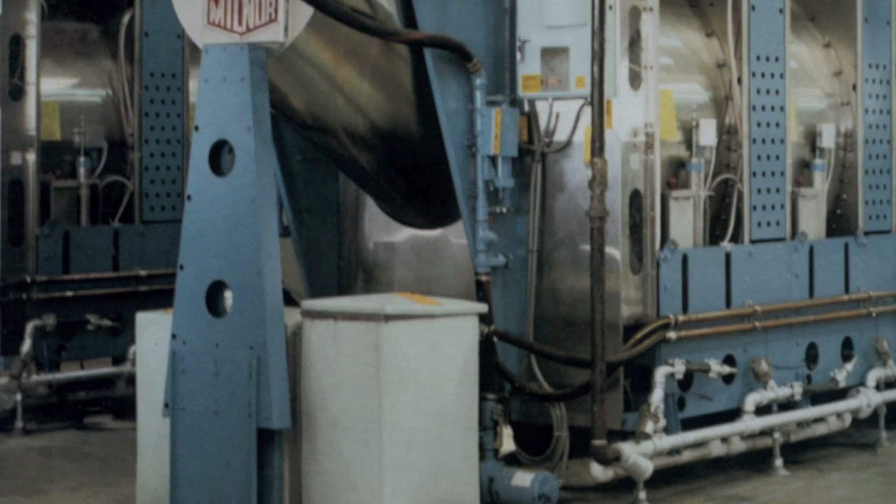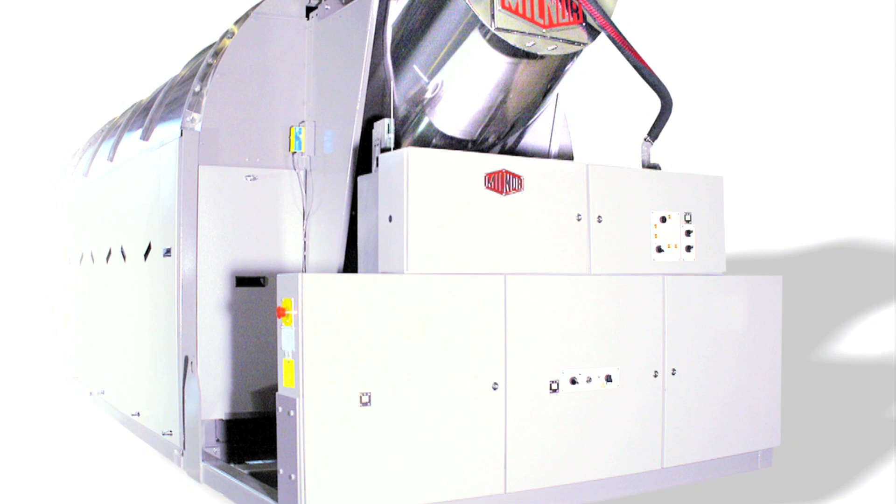In 1979, Milnor introduced its True Top Transfer CBW batch washer and has been a worldwide leader in tunnel washing since, with other innovations such as solid welded partitions, double drum construction, high mechanical action, and capacities ranging up to 260 pounds or 120 kilograms. Our productive and efficient equipment is unrivaled.

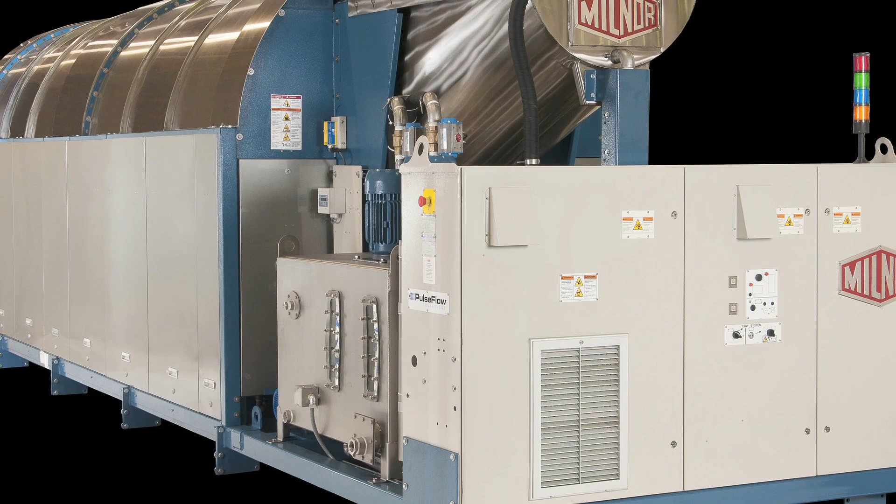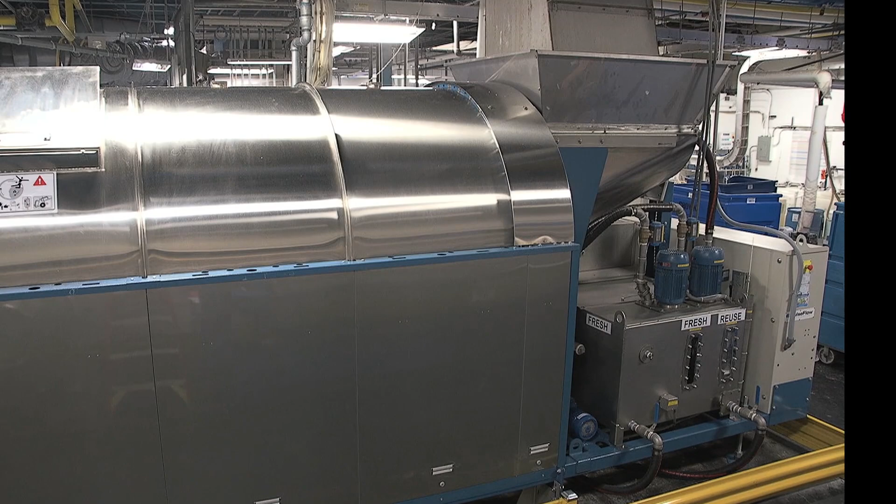In our continuing efforts as an industry leader, we introduced another CBW washer innovation in 2009: a revolutionary, patented and patent-pending system. Pulse Flow technology has been successfully implemented in healthcare, hospitality, and linen supply applications worldwide. The superior soil removal and rinsing performance of Pulse Flow technology has been verified by independent testing laboratories and has earned a Hohenstein Certificate of Innovation.

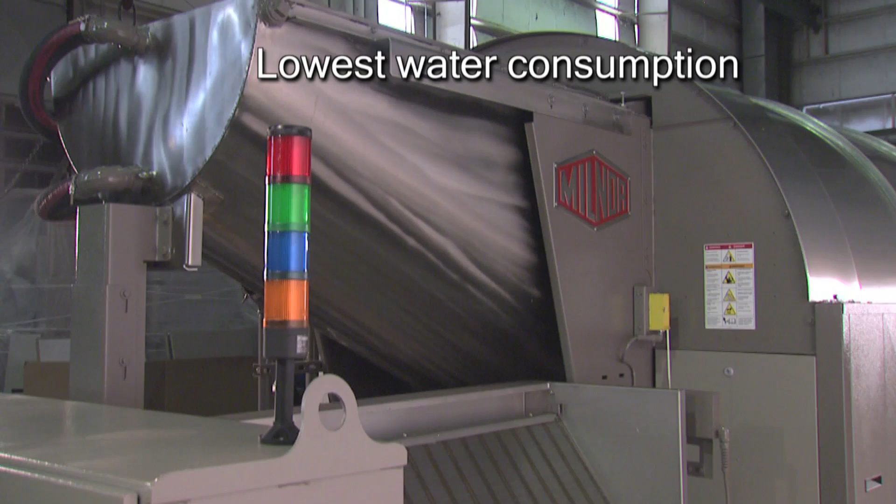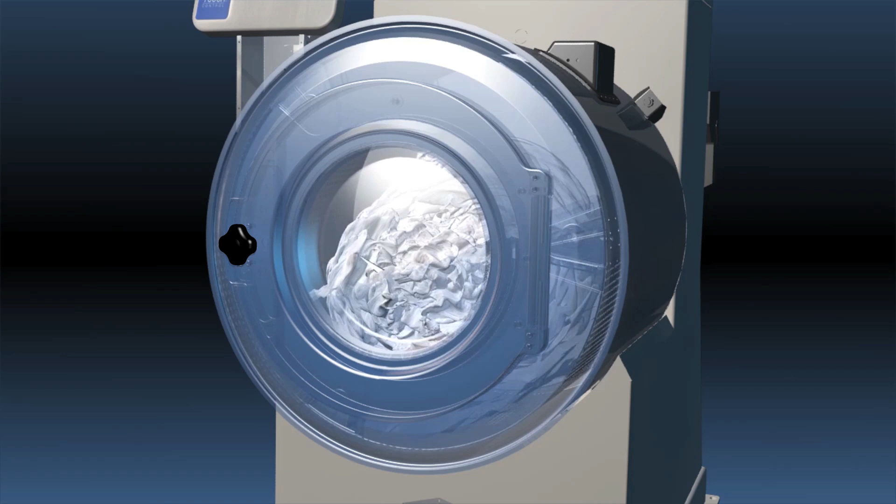Pulse Flow technology in a Milnor CBW washer offers lowest water consumption, enhanced chemical performance, low energy usage, faster washing, and longer linen life. To understand how Pulse Flow is able to produce quality linen with the least water consumption and significantly shorter process times, let's first review how a washer extractor performs these steps, and then compare.

A wash formula is comprised of three functions. First, standing bath processing with the appropriate chemistry for the step's function. Second, drain for dilution. And third, refill for rinsing. These steps are repeated depending upon the wash formula.

Pulse Flow emulates the same process while reversing the last two functions. In a Pulse Flow CBW, standing bath processing is achieved by turning off all water flows and closing the flow stop valves. There is no water moving in or out. For Pulse Flow, the minimum time for this function is typically 40 seconds to achieve chemical equilibrium.

Then Pulse Flow high-velocity rinsing turns on for the last portion of the process time. This is similar to step 3 in a washer extractor, except more efficient because of the high-velocity flow. And like a washer extractor, processing and rinsing take place in the same module, so the module is dual use.

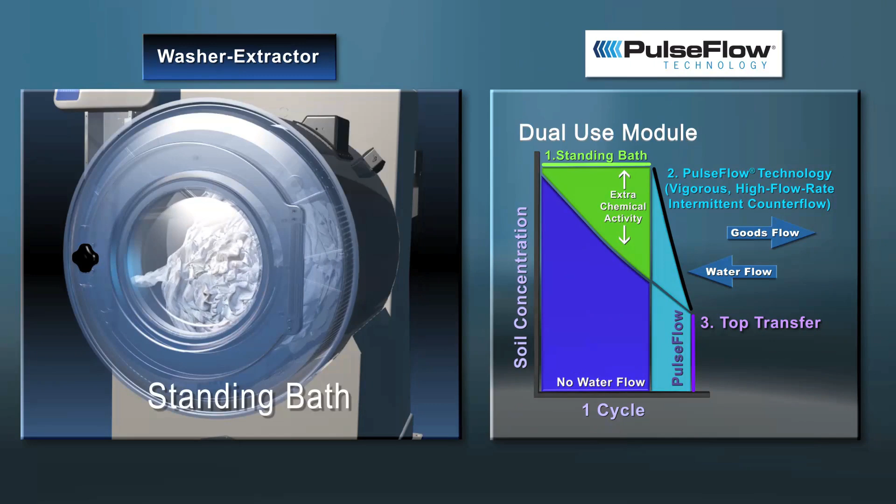Transfer to the next module occurs using True Top Transfer, which is equal to a drain, or step 2, in a washer extractor. Thus, Pulse Flow recreates the highly effective process methods of a washer extractor while using high-velocity counterflow rinsing and True Top Transfer to achieve very low water consumption and still obtain superior quality.

These curves illustrate what happens in subsequent modules in a Pulse Flow CBW. This 8-module Pulse Flow CBW has 7 dual-use modules, which function as processing and rinsing modules. Pulse Flow does not designate specific zones such as pre-wash, main wash, bleach, or rinse.

These dual-use modules perform the washing or bleaching function for the first part of the cycle time and then act as a rinsing module for the last portion of the cycle. Only the last module has a specific duty, that of applying the finishing chemistry such as sour, bactericide, and starch in most processes. Any makeup water injected here is fresh water.

Recirc 1, a patented pump arrangement in the first module, is an important part of Pulse Flow technology. It turns Module 1 into a working module by thoroughly wetting the linen and infusing chemistry. With Recirc 1, chemical concentrations quickly reach the proper levels and equilibrium is rapidly achieved.

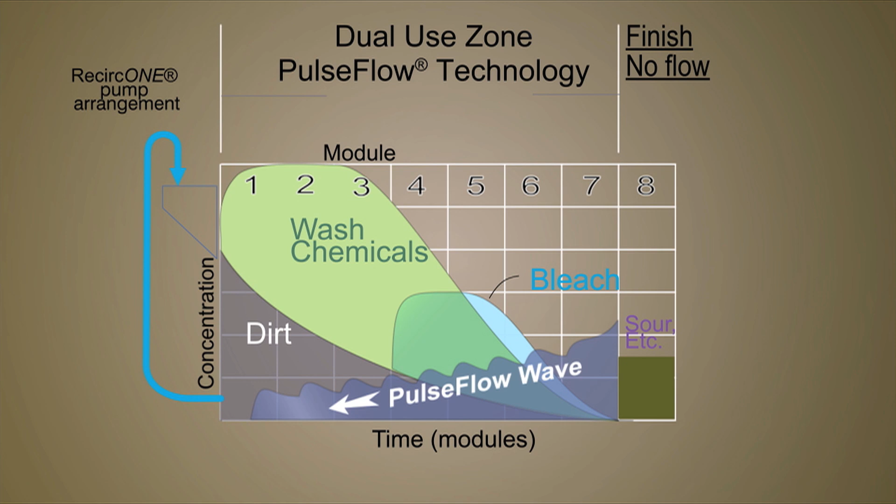What all this means is that pulse flow can increase linen life by achieving shorter wash cycles with excellent quality and low water consumption. Let's see what a pulse flow technology CBW washer looks like when processing goods.

The RecircONE pump wets down the goods as they enter the load scoop and infuses chemicals into the load quickly, ensuring the wash process starts in Module 1.

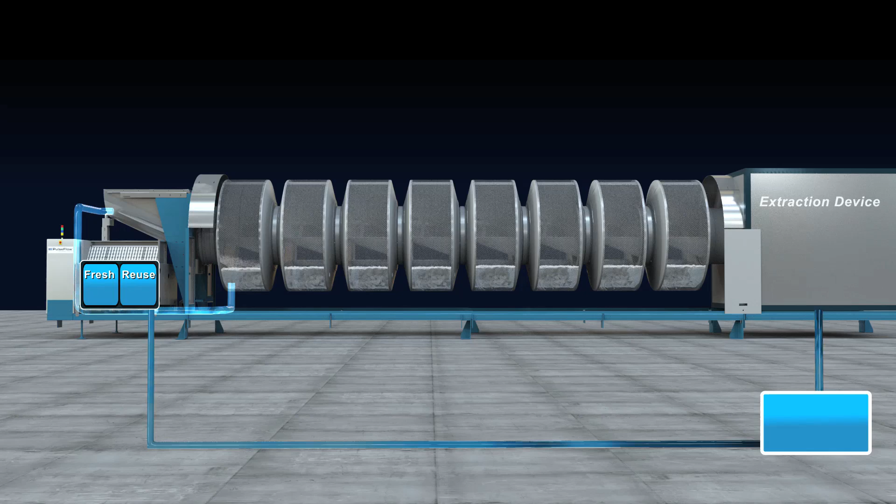The divided pulse flow tank is the single distribution point for all water to the CBW. Water recovered from the extraction device is sent to the reuse section of the pulse flow tank. A linen supply machine has an optional water source for color change.

Standing bath occurs for the majority of the cycle time, so chemicals are allowed to do their job without being diluted, and soluble soils are suspended. Then, for a very short portion of each cycle, high-velocity counterflow is applied, pulse flow.

The beginning of the pulse flow cycle is reuse water from the divided tank. The remainder of the pulse flow cycle is fresh water, so the last water seen by the goods is fresh. The pulse flow cycle provides the first part of the required dilution effect.

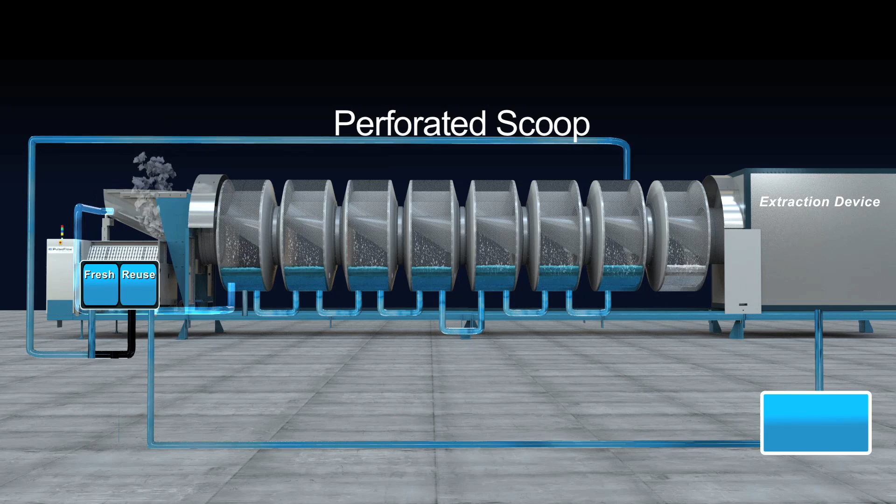The second stage of dilution, true top transfer, ensures the goods move into far cleaner water every time. Milnor CBW washers lift each batch of goods, drain the free water, then slide the goods into the next module where they are introduced into cleaner water. Only the water absorbed in the goods moves forward, ensuring significant dilution occurs during transfer.

Milnor CBW washers with pulse flow technology achieve very low freshwater consumption. For light soil linen, the expected water consumption is as low as 0.3 gallons per pound, or 2.5 liters per kilogram. On heavily soiled items such as bar towels, the expected water consumption is as low as 0.5 gallons per pound, or 4.2 liters per kilogram.

Lower water usage and recycling water means less water to heat to programmed wash temperatures, and new low-temperature chemical formulas work very well in the pulse flow washer, lowering energy use even more. Pulse flow is easily adaptable to steamless and package boiler configurations.

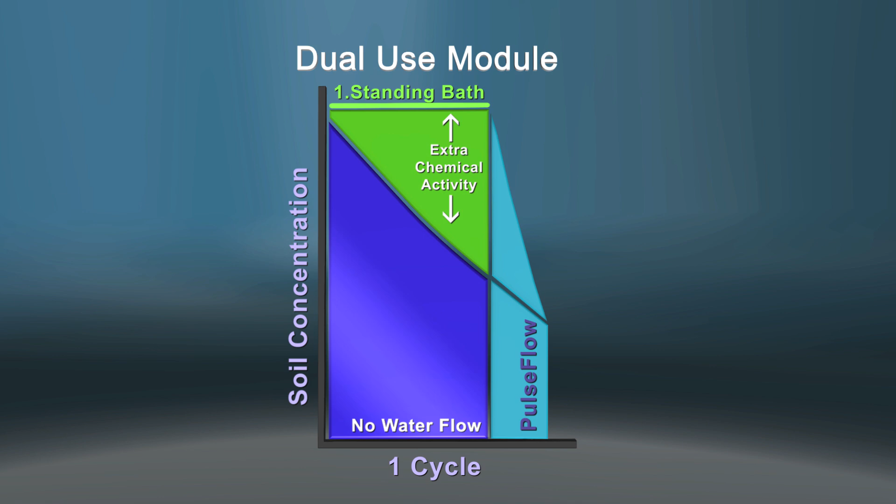The pulse flow system is able to achieve maximum chemical performance with standing bath washing and high-velocity counterflow rinsing. Chemicals work at full concentration from the start of each bath, and chemicals work faster because of the large cylinder volume and fast intermixing with the goods.

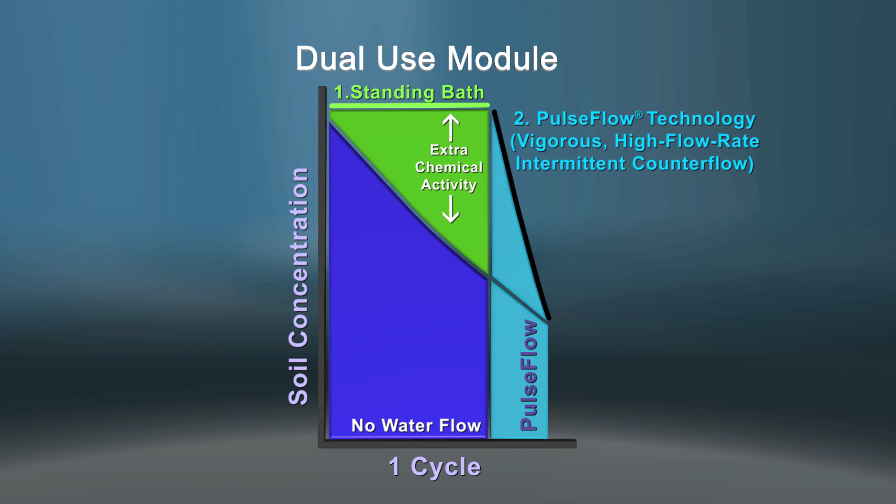In summary, with patented RecircONE, wet down is almost instantaneous. Chemistry penetrates the linen immediately, which is important for eliminating blood stains and removing protein stains. Module 1 is a working module.

There are other features which set a Milnor CBW washer apart, such as solid welded partitions for better bath separation, no seals below the water line which could wear or leak, thus reducing maintenance cost.

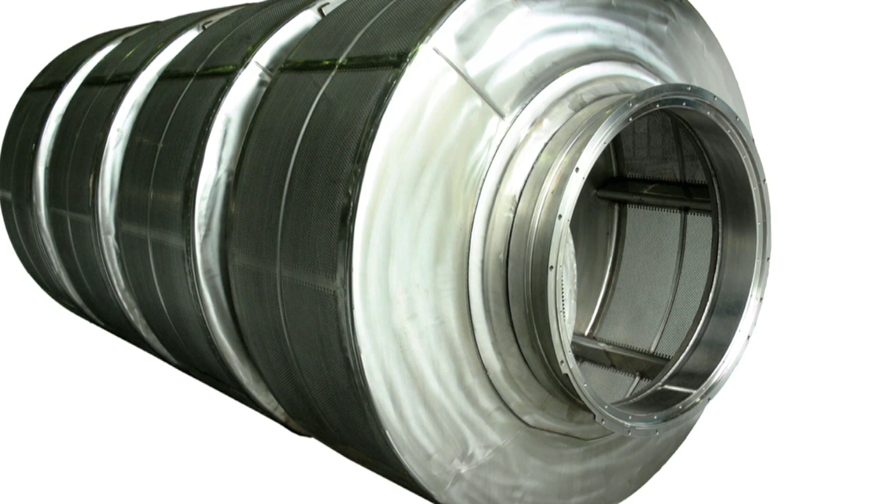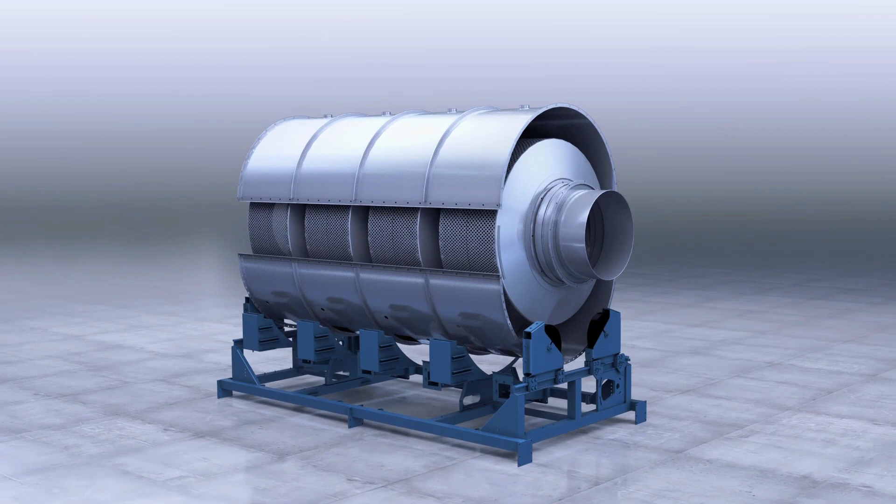With a large cylinder volume, goods are not tightly packed, and high mechanical action is achieved to effectively loosen and remove dirt from fibers. A large cylinder perforated area allows water and chemicals to penetrate goods completely and quickly. Double drum construction simplifies injection of water, supplies, and steam, plus allows draining and temperature measurement.

For more than 40 years, Milnor CBW batch washers with true top transfer have washed about 30 to 40% faster than batch washers using bottom transfer designs.

Milnor CBW washers with pulse flow technology wash even faster, reducing the number of modules needed to process a given capacity, reducing capital investment costs, and saving floor space. Shorter process times mean less wear on your linen and longer linen life.